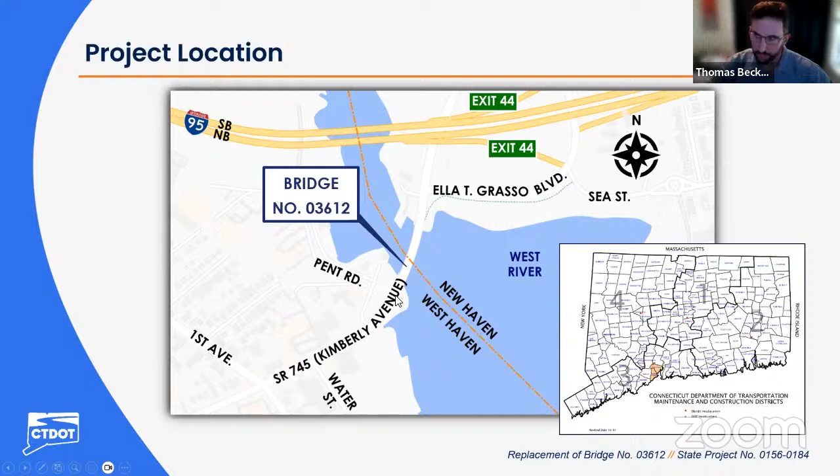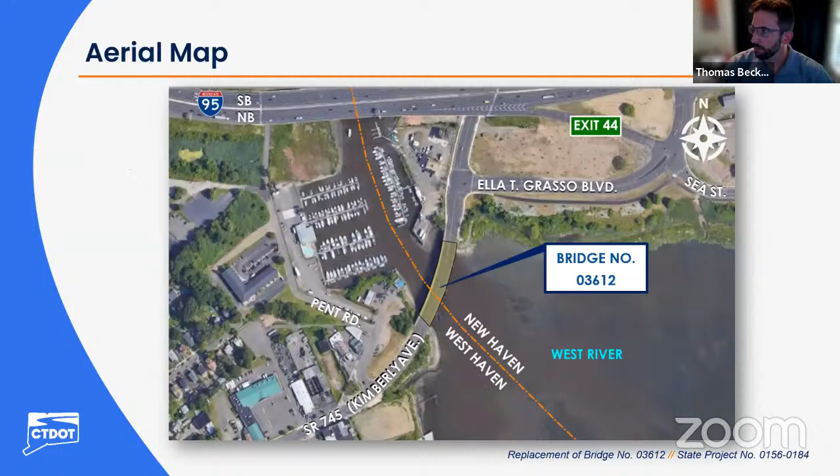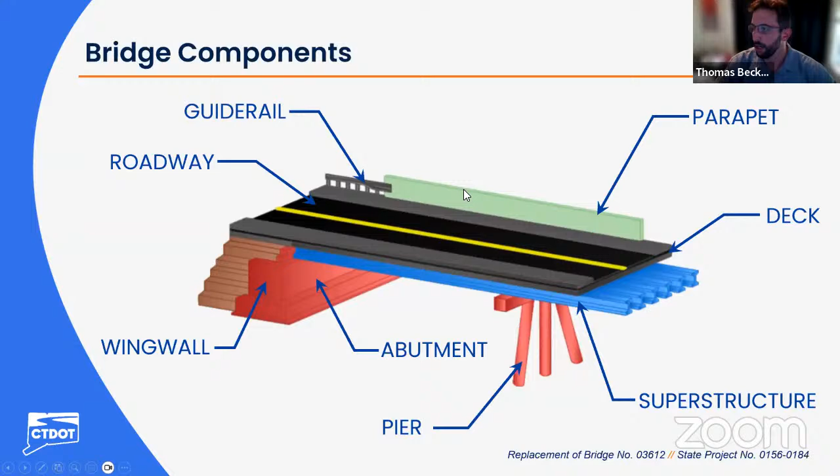Our existing structure, the bridge, is known as the Officer Robert Vincent Fumiatti Memorial Bridge. It was built in 1969, and it is a 4-span multi-girder structure supported on reinforced concrete piers and pre-stressed concrete piles.

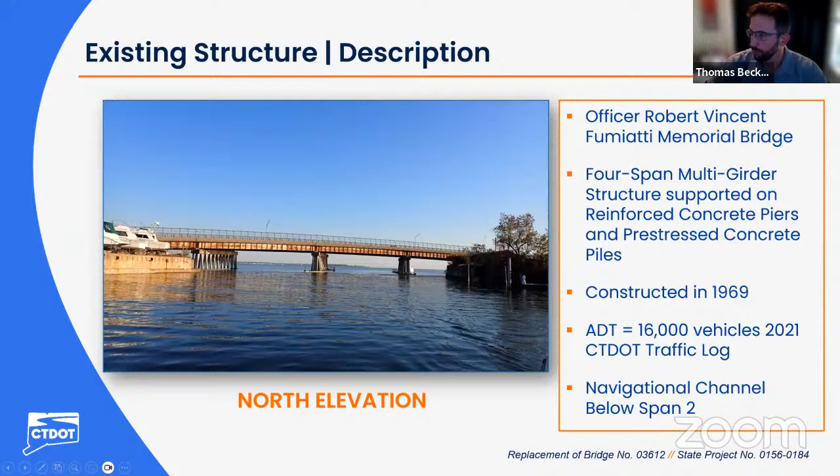Our average daily traffic along this bridge, based on the 2021 count, is 16,000 vehicles per day. There is an existing navigational channel below span 2, which you can see here, as well as a fender system, a wooden timber fender system.

This just allows you to see the existing configuration of the bridge, which has a 5-foot sidewalk on each side of the bridge, as well as 2-foot shoulders in each direction, and then two 12-foot lanes for vehicle traffic in both directions.

At this point, I am going to turn the presentation over to Ben Hawthorne with H&H, who's going to walk through the proposed design with you.

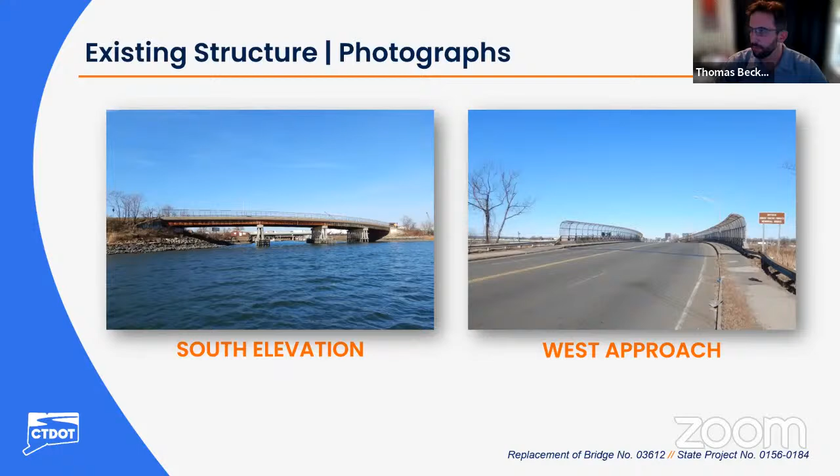Our purpose and need of the project is to address the structural deficiencies of the existing structure. The condition of the bridge was determined as part of the February 2024 inspection, where the substructure, specifically the piers, was noted to be in condition 4, which is poor. This is due to concrete spalling with exposed reinforcing and some section loss of that reinforcing.

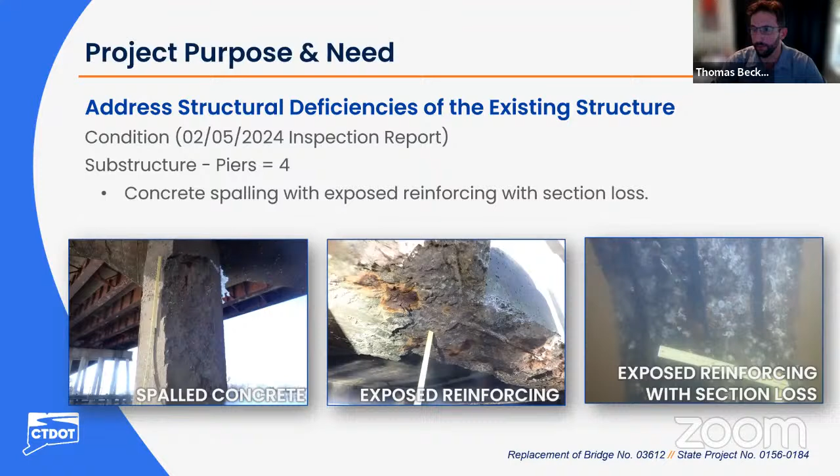This project includes intersection improvements to the north and south of the bridge, including traffic signal equipment, ADA compliant sidewalk and ramp modifications, additional signing, paving, and marking.

The project will also include a shared use path on the east side of the structure and approach that will tie into existing pathways at the approaches to the project site and through into New Haven. The existing 4-span superstructure and all substructure elements will be removed and replaced with a new structure.

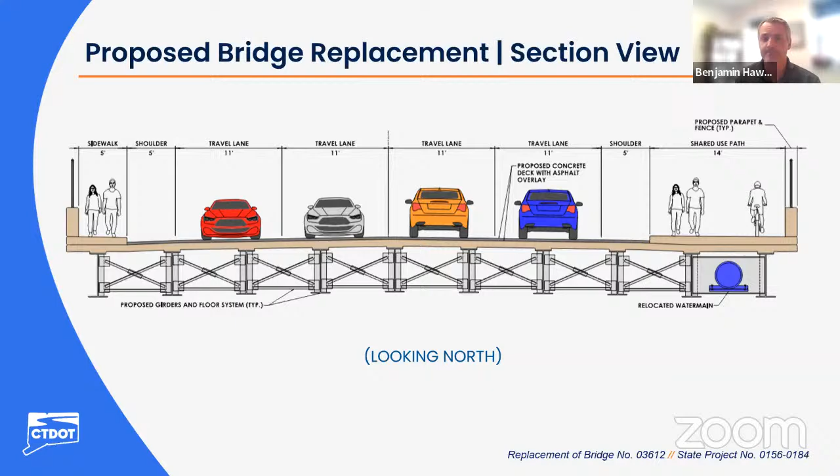At this time, the bridge is intended to be built using a staged construction approach, maintaining traffic across the structure during construction. During stage 1, traffic is proposed to be reduced to 1 lane in each direction and shifted west to replace the east half of the bridge initially.

An anchored temporary traffic barrier will be utilized to protect the work zone. Note that the existing water main is located on the west side of the bridge. The new water main will be relocated to the east side of the bridge, as shown, to allow replacement of the structure with minimal impacts to the water line service.

During this stage, pedestrian traffic will be maintained on the existing west sidewalk.

Southbound traffic is proposed to shift to a single lane to the west of the existing roadway, just north of the I-95 overpass. Coming from New Haven, a single lane currently opens up to the through lane with also a turn lane, so the intent is to maintain that single lane through.

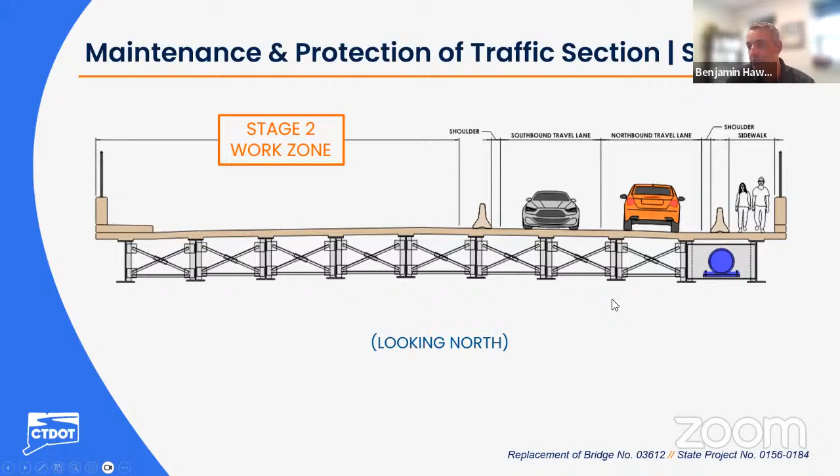Again in plan view, for the proposed traffic configuration in stage 2, the northbound traffic on Kimberly Avenue will be shifted east to a single lane south of the Kimberly Avenue extension.

Southbound traffic is proposed to shift to a single lane to the east of the existing roadway, just north of the I-95 extension. Modifications to the lane striping on westbound Ella Grasso Boulevard are intended to remain the same as in stage 1 and stage 2.

After completion of the bridge reconstruction and all approach work, the existing lane configurations will be restored. And at that point, I hand it back over.

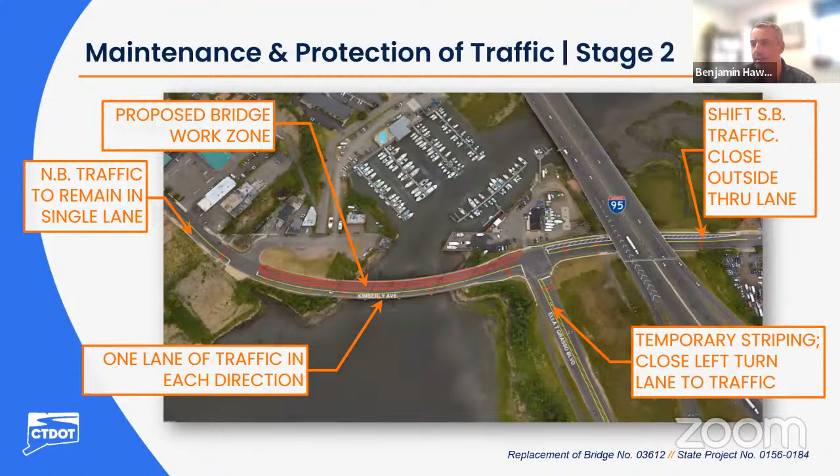Excellent. Thank you, Ben. Tom Beckman with BL Companies again. I'm going to go through a couple of other items here, specifically the utilities and rights of way.

As Ben had noted during the presentation, there is a 30-inch water main currently on the bridge. It's owned by the South Central Connecticut Regional Water Authority, and any impacts to that will be minimized during construction.

As far as right-of-way requirements for the project, there is one construction easement anticipated, which was shown in the plan.

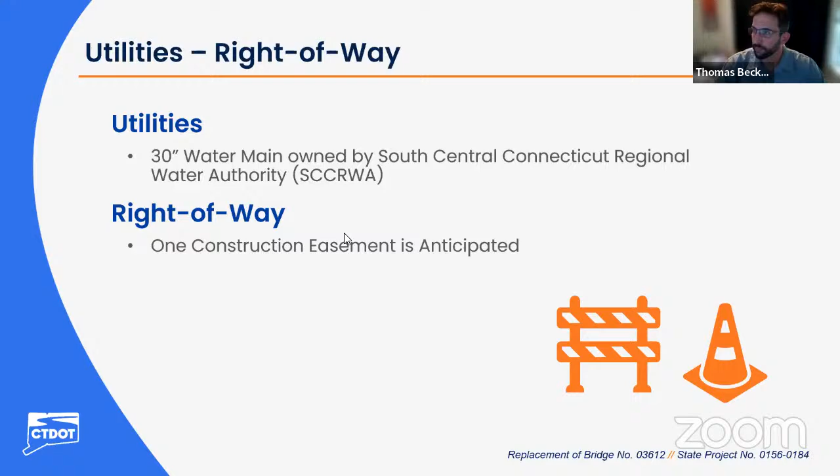The project will require environmental permits for construction and design. As Ben noted, there will be a subsurface exploration for the project, which will require permits from the Connecticut Department of Energy and Environmental Protection, as well as the U.S. Army Corps of Engineers. In construction, additional permits will be required.

There will be 5 permits required from the Connecticut Department of Energy and Environmental Protection. From the U.S. Army Corps of Engineers, there will be 2, and this project will require a permit from the U.S. Coast Guard. Housekeeping note here: what you're seeing on the screen is the permit names, not necessarily the activities taking place as part of the project.

And with that, I'm going to turn this over to Matt Giannakopoulos with Connecticut Department of Right-of-Way. Thanks, Tom. I'm Matt Giannakopoulos, a project coordinator with the Department's Division of Rights-of-Way. It's our office's responsibility to acquire the property rights that are needed for transportation projects.

As Tom had just mentioned, and as was shown earlier, the proposed project design does require the acquisition of a temporary construction easement from one property. While the department has already met with that property owner to start preliminary discussions, I am here tonight to give a brief overview of the department's acquisition process.

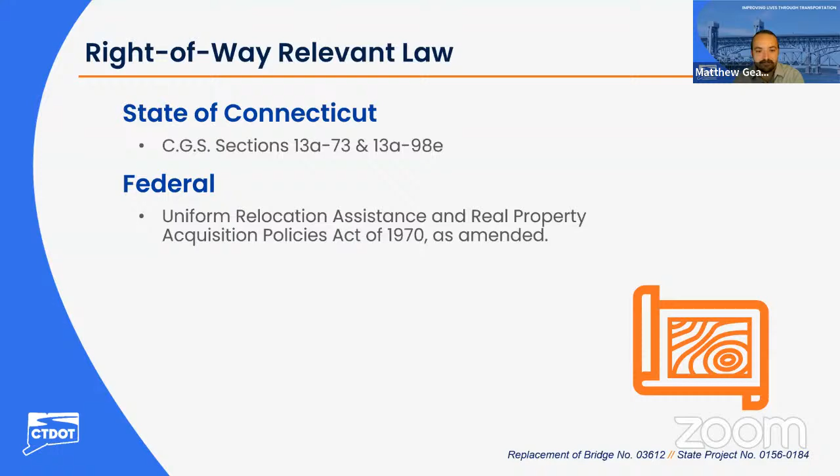Once the design has progressed to the point where we know exactly the limits of any construction easements we need or any other rights, we're ready to begin the acquisition process. Each impacted property owner will receive a letter of intent to acquire along with a property map, which will depict the exact rights to be acquired.

At that point, we determine the fair market value of those rights, and we use that to establish an offer of just compensation. That offer gets sent out to the property owner in writing, and then an agent from our office is available to meet with the property owner or owners and discuss with them in detail the project, the impacts to that particular property, and explain how the department came up with that offer.

The owner would have a reasonable time to consider the offer and enter into negotiations. Once an agreement is reached, the DOT prepares all the necessary paperwork to transfer those rights, and they file a deed and the property map on the town land records.

However, if negotiations reach an impasse, in order to allow the department to proceed with the project, the department may acquire the rights it needs through its power of eminent domain. What happens in that event is the department files a notice in the local superior court along with a monetary deposit in the amount of that offer of just compensation.

The property owner would have 6 months from that date to file an appeal if they felt the offer was inadequate. Whether or not the owner chooses to use their right to appeal, they can apply to the court to withdraw that deposit at any time.

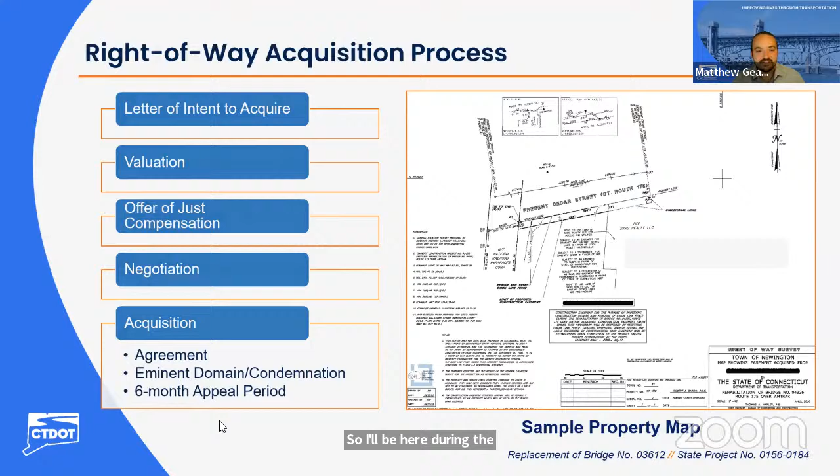Thanks, Matt. At this time, we're anticipating construction to begin in 2027 and to be completed by 2030. We are currently estimating a construction cost of approximately $60 million, which will be paid for with 80% federal and 20% state funding. No funding would be required from the cities. Please note these are preliminary figures and subject to change.

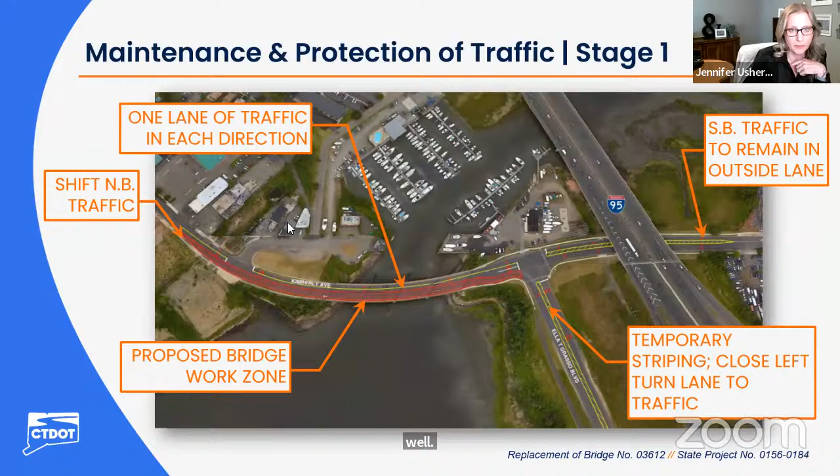All right, thank you so much, Lisa. Our next question is from Aaron Good asking, can you show exactly how the protected bicycle pedestrian path on the northbound side will connect to the existing East Coast Greenway that runs along C Street and Ella Grasso Boulevard? I believe Tom Beckman is switching over to that plan view and we'll speak to that right now.

All right, I had a mute problem too. So you can see here is the plan view that was presented as part of the presentation. So that connection you're specifically looking for here in regards to the shared use path being extended in. So the existing bridge is carrying a 5-foot sidewalk along it. As it turns Ella Grasso Boulevard, makes a turn, and then it hits this asphalt section.

I know it's a little light and faint to see here, hopefully you can see the laser pointer. It extends out to that full 14-foot width as we head down Ella Grasso. So what the project is intending to do is taking that full width, and we're going to carry it across the bridge or carry it through the intersection and then up to the bridge and across with the tapering down to meet existing sidewalks in West Haven. Hope that answers your question.

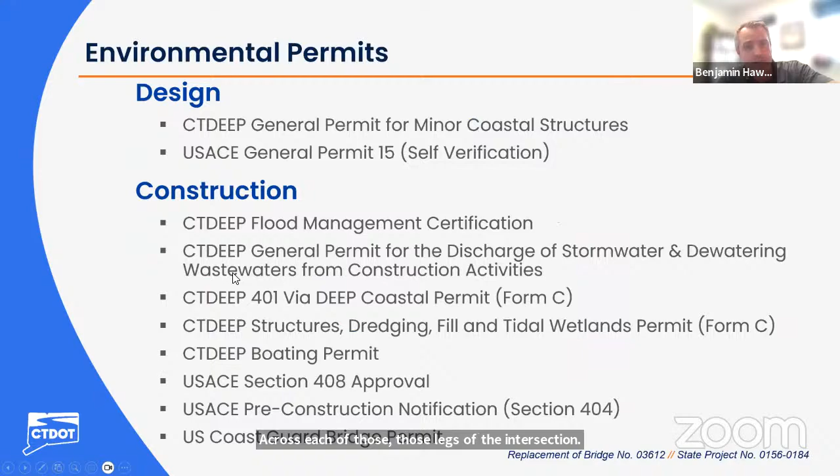The Ella Grasso Boulevard intersection with Kimberly Avenue currently does have crosswalks across each of those legs of the intersection. But with any of the improvements and modifications to the shared use path, we will be upgrading the pedestrian signal facilities and things of that nature.

Signal improvements that go with those crosswalks will be performed, and the intent is new traffic signals at the Kimberly Avenue extension as well. And as Lisa mentioned, we will be looking at signal timing through all phases of construction.

Perfect, thank you so much, Ben. All right, let's move on to our next question. Ben, I think you're going to take this one as well.

This is from Anstrus Farwell, asking any information on the design of the protective fence. It needs to be attractive to pedestrians, and yes, having a place to stop to enjoy the view. Some good comments there.

Yep, so similarly we agree, and we're going to take into account what this fencing is going to look like, and as we look at the overall layout of the structure, make sure it can accommodate any modifications to the outer width to incorporate things of that nature. So we'll take that comment into consideration and work with Connecticut DOT.

Yeah, absolutely. I think the aesthetics of this bridge are pretty important to everyone, not only to the two cities, but certainly to DOT as well. So we'll be working on all of those aspects.

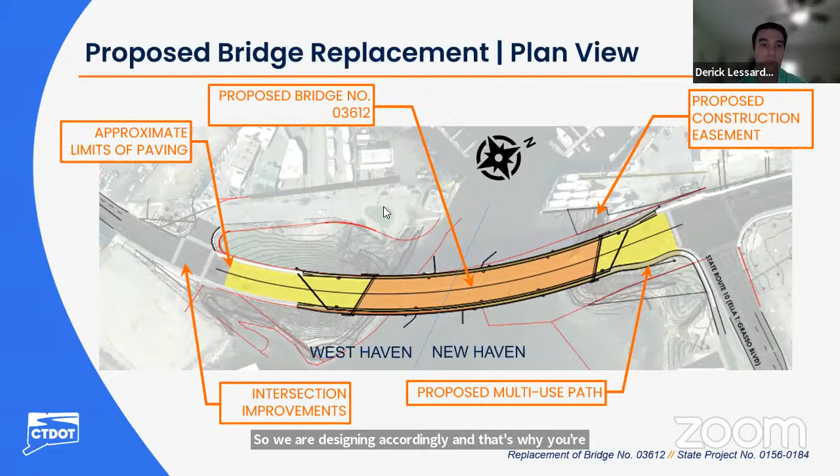All right, great, it looks like we're going to bring up again the emails. Oh whoops, I think we just lost our share. Give it a second to bring that back. In the meantime, I'll go to our next question as we wait for that to pop back up. Let's see, we've got a couple more questions coming in, let me go through those.

Let's see, I'm going to go back to this one. This is an email question from Mark Abraham, saying: I live in the area and frequently use this bridge. I think the proposal does not do enough to calm traffic. Drivers will be speeding over the bridge at 60 miles per hour, causing significant harm. Please consider narrowing the travel lanes to reduce vehicle speeds. Also, I think that the shared use paths for bicycles and pedestrians should be wider and added on both sides of the bridge. This is a key connection on the shoreline trail that a lot of people walk or bike on. As the area develops, there will be more demand for biking and walking on the side of the bridge where you are currently proposing one sidewalk. At the very least, please add several feet of width to the shared use path on the harbor side.

So I will just answer the beginning of this question, and then others can chime in as needed. Certainly understand the concern about the speeds, I think several folks have spoken to those this evening. One of the things being done in the proposed design currently is a reduction in the overall width of the lanes, so that should help do some of the calming that you're looking for. Additionally, the walks and the cyclist and pedestrian accommodations are being increased compared to what there is today. So understanding that it may not be as large as you're looking for, but I think the project team will be taking everything into consideration that's been said tonight, and looking to really finalize the design and hopefully work to make everyone as happy as possible. I'll give anyone else an opportunity to chime in on that one.